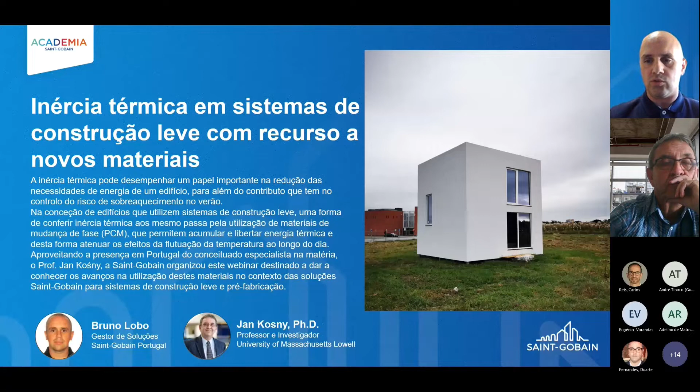Este webinar tem como foco a inércia térmica em sistemas de construção leve com recurso a novos materiais. Este é o projeto Thermacore, da qual somos parceiros, desenvolvido pela Universidade de Aveiro, que consiste em avaliar a eficiência térmica de painéis PCM macroencapsulados e a inércia térmica deste tipo de construções. Eu vou só contextualizar um pouco o tema para depois o nosso convidado, o professor Jan Kosny, definir aqui um bocadinho mais em termos de soluções deste tipo de materiais.

Aqui apenas um pequeno enquadramento do projeto e das soluções usadas. Este projeto consistiu, e consiste ainda, pois ainda não terminou, na construção de 2 células de teste de tamanho real, usando a mesma solução construtiva, cerca de 5,5 metros de largura, 5,5 metros de profundidade e 5,5 metros de altura. Ambas estas células foram instaladas no mesmo local, com exatamente a mesma orientação solar, apenas afastadas entre si para que uma não tivesse qualquer efeito de sombreamento sobre a outra.

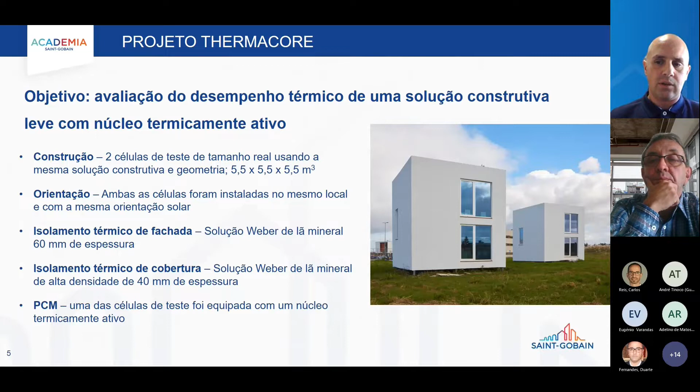O sistema estrutural é o mesmo, assim como o isolamento térmico da fachada e da cobertura, com a exceção de que uma das células tem os tais painéis PCM, enquanto que a outra não tem.

Aqui vamos focar um pouco nas soluções Saint-Gobain que foram integradas neste projeto. A estrutura destas duas células de teste é uma estrutura em LSF, revestida exteriormente com placas GLASROC X Load Bearing, placas estruturais com certificação estrutural para este tipo de sistemas, desenvolvidas idealmente com resistência para zonas úmidas e zonas exteriores.

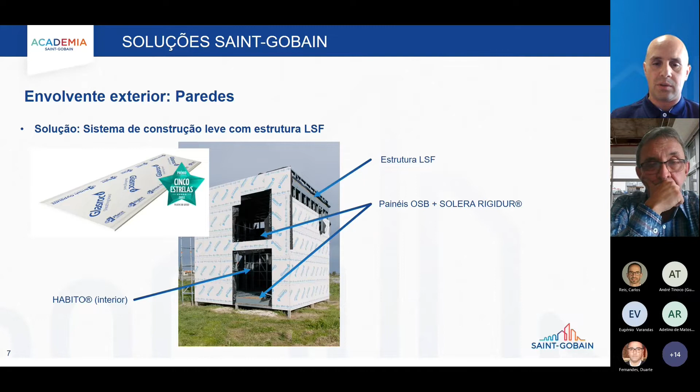O contacto com a água para a placa em si, mesmo sem qualquer tipo de tratamento especial adicional, não é um problema. No interior foram usadas placas HABITO, placas também de gesso laminado, mas aditivadas no seu processo de fabrico, de modo a lhe conferir capacidade estrutural. Ou seja, a combinação destas duas placas, por dentro e por fora da estrutura LSF, conferem estabilidade a esta estrutura.

Ao nível dos pavimentos, foi usada uma solução compósita de painéis OSB e a solução Solera Rigidur, composta por duas placas Rigidur solidarizadas entre si, de modo a conferir melhores propriedades térmicas, importante para o piso térreo, e também propriedades a nível de acústica.

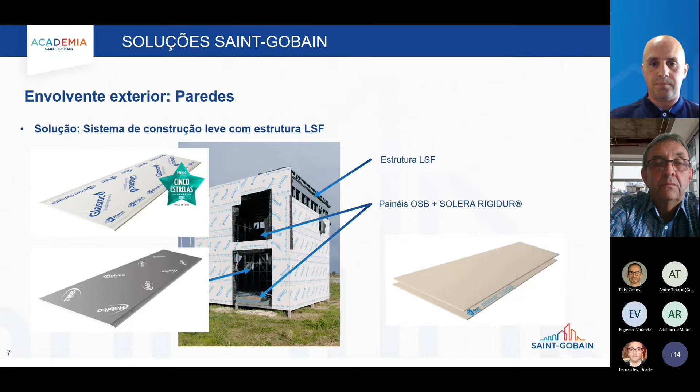No exterior, e para complementar a fachada, foi usado o sistema Webertherm Comfort, constituído pela placa GLASROC X Load Bearing mencionada anteriormente, um barramento, uma colagem feita no Weber Therm Pro. Posteriormente foi colocada uma lã mineral, lã de vidro de alta densidade, Weber Therm Clima 34 de 60 mm, complementado o barramento armado também com Weber Therm Pro e Webertherm rede normal, e antes de dado o acabamento em Weberplast Decor Plus foi aplicada uma camada de Weberprim regulador.

De referir novamente que esta solução foi aplicada nas duas células, exatamente a mesma coisa para podermos comparar os resultados. Os envidraçados foram realizados com caixilharia de alumínio, com corte térmico e com vidro Saint-Gobain, com um coeficiente de transmissão térmica U de 1.0 e um fator solar de 0.22.

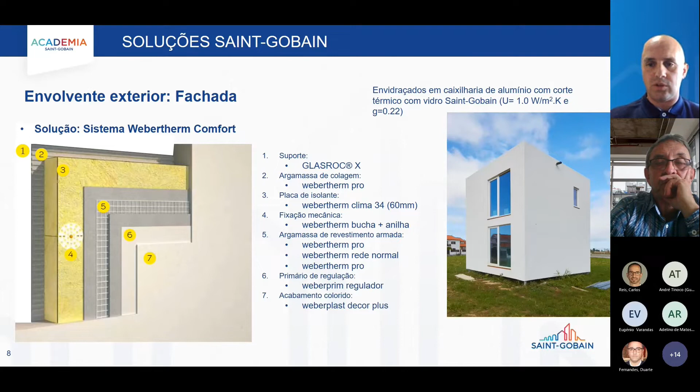Ao nível da cobertura, foi também realizada uma solução híbrida, seguindo o mesmo racional do pavimento. Foram usados painéis OSB, juntamente com a GLASROC X Load Bearing, que é uma continuação da fachada, e posteriormente foram colocados painéis de rocha IXXO 40mm, que já vêm preparados com uma emulsão que permite a aplicação direta de membranas bituminosas.

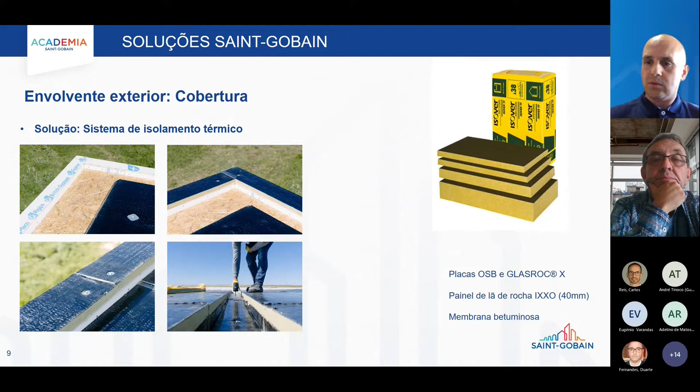Para fazer a impermeabilização da cobertura, temos aqui os painéis que acabei de referir. O resultado final da cobertura, podemos ver aqui duas fases: na célula da direita vemos ainda a fase de aplicação final das placas IXXO, enquanto na célula do lado esquerdo já temos a cobertura concluída e devidamente impermeabilizada.

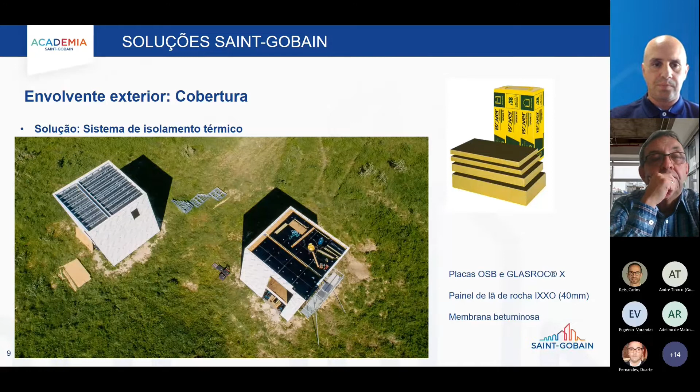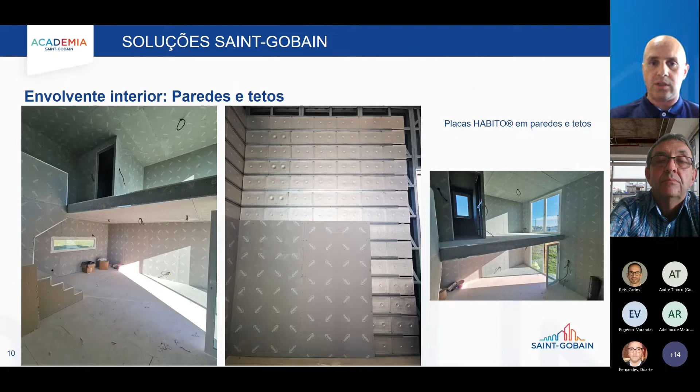Ao nível da envolvente interior, todas as paredes e tetos foram finalizadas com placas HABITO, sendo que, como referi anteriormente, uma das células foi revestida com estes painéis PCM, que era um dos objetivos do teste. Tal como pelo exterior, pelo interior as células de teste são iguais, com as mesmas divisões, colocadas com a mesma disposição, apenas a única diferença, volto a referir, são os painéis PCM.

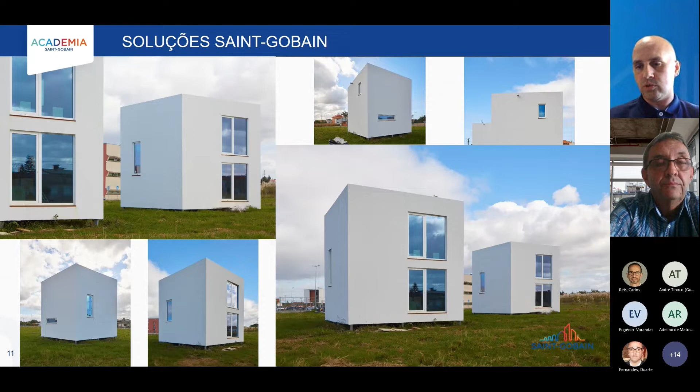E pronto, agora vou passar a palavra ao professor Jan Kosny, que vai esmiuçar aqui um bocadinho do tema da inércia térmica neste tipo de sistemas.

Professor, now it's your turn.

Thank you very much, I really appreciate the invitation. Sorry I'm not speaking in Portuguese, didn't have enough time in my life to learn yet, but maybe at some time I will. I must say at the beginning that it's a great pleasure to be invited into the Saint-Gobain related project, because in my life in the United States I've been involved in many projects together with Saint-Gobain. We had several projects focused on thermal insulations, and also several projects focused on both wall and roofing systems. So this is a very nice opportunity to be part of that activity here in Portugal, when you have wonderful climate conditions combined right now with the super advanced thermal testing facility for buildings.

I am quite positive, after seeing that facility and working with my colleagues from University of Aveiro, that pretty soon that facility will be well known, because I think they will be able to demonstrate advantages of the thermal mass and phase change materials. I think that in the near future they will be able to advance the path of how Portuguese buildings can go into zero energy space conditioning, achieving zero energy without most of the energy coming from mechanical systems, which can be very unique and actually very important considering the situation in Europe which we have right now.

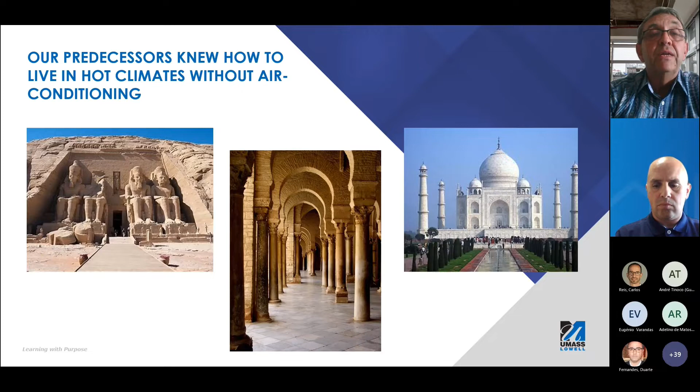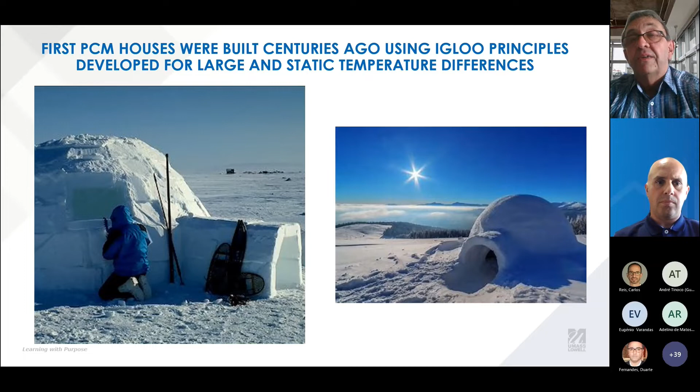Moving to the next slide, you can see that people have been using thermal mass and phase change materials for generations as well. This is an example of an early phase change material house, built long ago in history. You can see that generations of people up north have used this construction successfully with acceptable thermal comfort conditions. Now I'd like to show the building which is really the first phase change material building ever built.

This building was built by Maria Telkes, a professor at Massachusetts Institute of Technology, in 1941. In the early 1940s she analyzed the climate of Massachusetts and figured out that over a 65-year period, the longest time without sun was 9 days. So she designed an amount of PCM in that building to provide enough heat for 10 days without sun. And that building worked very well, providing 100% of the energy needed for heating.

It's a great message for you guys in Portugal. Comparing the climate in Massachusetts and in Portugal, they're just two different classes - you have much better conditions and much more sun. So looking from that perspective, this is a combination of thermal mass, phase change thermal mass, and solar design. If you use those advantages in Portugal, it's a message that we can easily achieve zero energy construction without adding too much expense.

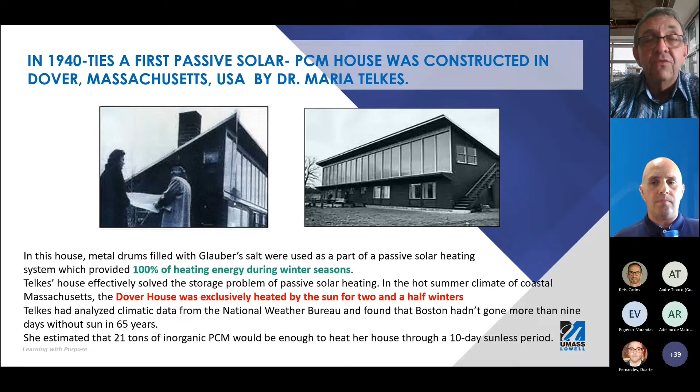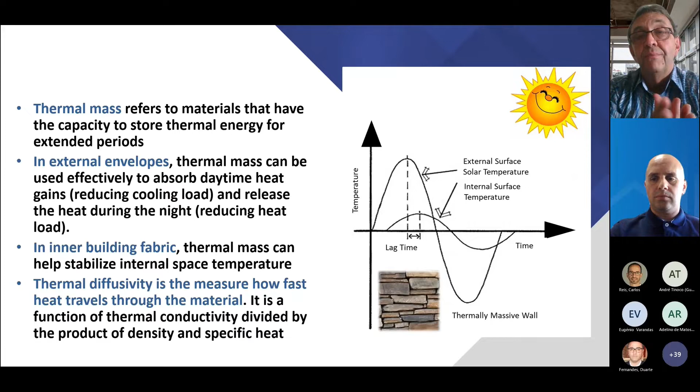This is very important, and you will see in further slides that in the national policy situation, when you have millions of people trying to use air conditioning units at the same time of the day, maybe not a healthy situation for the energy grid and the power companies, we have the tool to manipulate that peak load. Please remember that in most developed countries, buildings represent about 40% of energy consumption. I don't know exactly the number for Portugal, but I assume that number is similar here.

I would like to spend a little bit of time explaining to you what PCM, phase change material, is. And again, let's go to an example. Let's imagine that we have 2 glasses of Coke. 1 glass of Coke is without ice. Another glass of Coke is with ice. And we are walking on the street in the middle of the summer with 35 or 40 degrees Celsius. After 15 minutes, maybe half an hour, we try to drink Coke from one hand and from the other one. Imagine which one will be more pleasant to drink.

That one with ice. Now imagine we have a roofing insulation or roofing design, and one roof is without that extra ice. Let's call this ice phase change material. Another one is with phase change material. In the middle of the summer, the temperature of the roof without phase change material rises rapidly, following the sun moving through the sky. Quite early in the morning, 10 o'clock, the temperature is already going up. And the building is seeing this. Most commercial buildings use air conditioning, and they will have to react to that temperature increase.

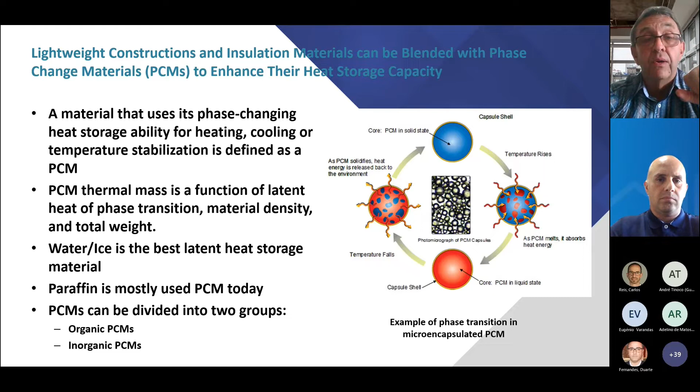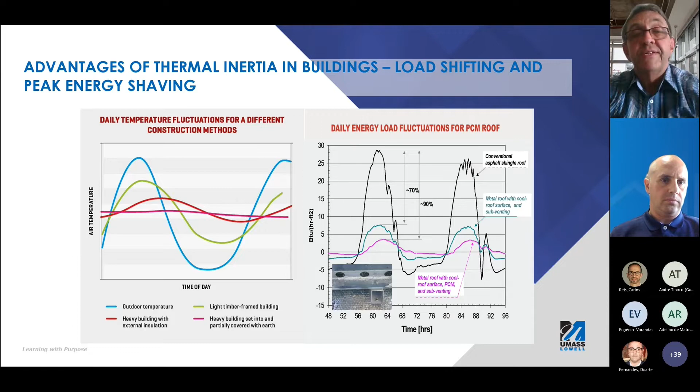And you can see from the statistics that we can reduce the peak load by 90%. It is just for one day, but it is easy to do 90–95% for the whole summer. So this is achievable. It's only a matter of using proper materials, proper technique, proper design. For those people who will ask me, okay, you have a different R value or U value for those roofs: no, the steady state U value in all those experiments was exactly the same. The next slide shows that people have been using phase change materials for several decades, and I give examples of the different systems.

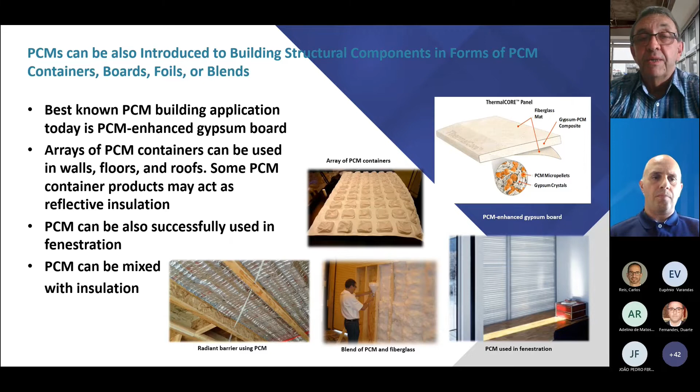And another important product on top is one of the gypsum board products, which has been known around the world for many years and used with more or less success, depending on design and on the phase change material used in that board. Around the world, probably 1,000 applications. And we can see also one of the applications when somebody is using phase change material as a part of the fenestration system.

So talking about phase change materials and thermal mass, I would like to tell you a little bit of information about advantages. I've been doing phase change materials for several decades. In the past, everybody was looking for energy savings. Right now, we are going to significantly different challenges and significantly different ways of applications of phase change materials.

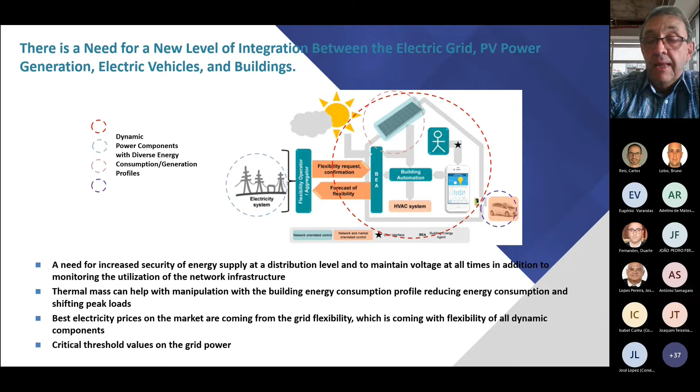But what we have right now, we have solar systems, renewable energy systems, which are extremely dynamic. And we have electric mobility, electric cars, which are another very dynamic group. An interesting fact about electric mobility is that they are coming with huge capacity for energy storage, because cars are coming with batteries. On the other side, we have the electric power grid, which is another very dynamic component. And in all this dynamic environment, phase change material can play a very important role.

In each average building, we have two major peaks. One morning peak, about 7 o'clock to 9 o'clock. Then energy use goes on in an almost leveled situation. And then we have a huge peak about 3 o'clock to 7 o'clock. Those peaks create a situation our energy system has to be designed against.

Our power supply systems are not designed for average energy supply. They are usually designed for the peak energy supply. And if that peak is going up significantly, we have to add additional capacity to produce in each country. And also we need to add additional capacity to transmit that power and deliver it to users. This is a very significant expense to each nation, and each nation is trying to minimize those peaks.

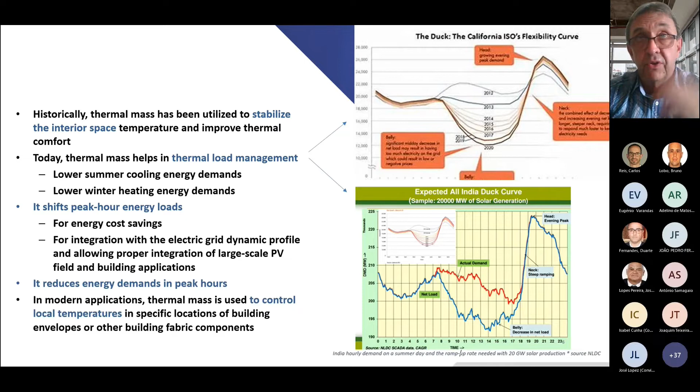And it is very, very important to have the capability to store energy. It doesn't matter if this is electric power or thermal power, because as I said, in buildings we can manipulate those loads, and buildings represent 40% of the whole energy portfolio in developed countries. So moving forward, I would like to discuss a little bit about thermal storage capabilities, and give you an example of how important thermal storage capabilities can be.

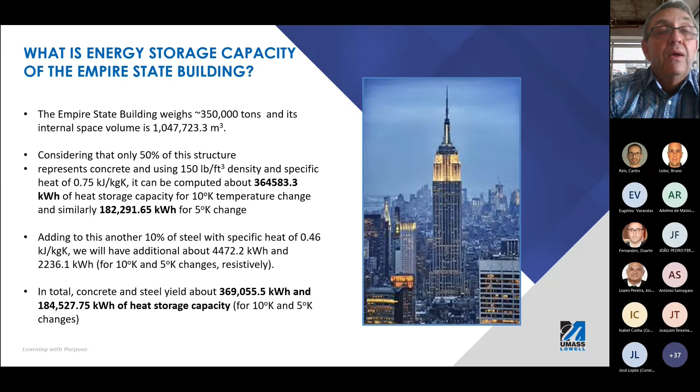I took the example of the Empire State Building. If you calculate all the concrete and all the steel in the Empire State Building, and assume a delta T of 5 degrees Celsius or 10 degrees Celsius, with a simple calculation of the amount of mass in that building, density, and heat capacity, you will see that the total heat capacity of the building is tremendously high: about 369 thousand kilowatt hours for 10 degrees, and 184,527 kilowatt hours for 5 degrees, assuming the temperature change goes through 5 degrees.

Now let's compare this to something. I did a comparison to Tesla Powerwall batteries. Each Tesla Powerwall battery, which is the system Tesla sells with their solar systems around the world, has about 7 kilowatt hours. So imagine that for a 10 degree temperature difference, the whole Empire State Building is equivalent to almost 53,000 Tesla batteries. If we assume a smaller 5 degrees, though most colleagues around the world use 10 degrees in analysis, we have 26,000 Tesla batteries. This is the thermal storage capacity of that building.

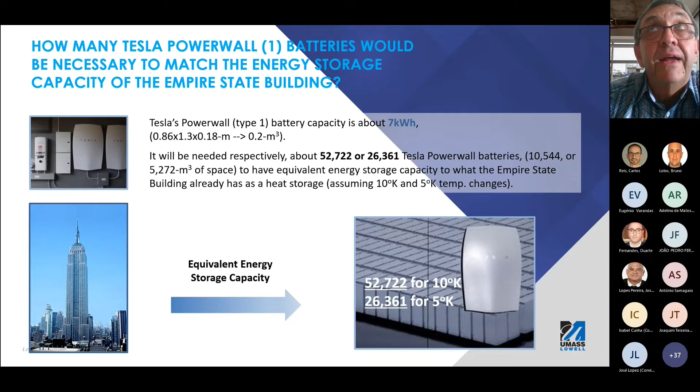Of course, we can ask ourselves how available this energy is, and so far, yes, I agree. But also ask yourself how many buildings like this we have in each country. How many concrete buildings? How many multi-story buildings? How many shopping malls? This is huge capacity which can help the whole energy economy for developed countries, and not only developed countries. We also have millions of residential buildings, and in the US, 60% of energy consumption in the building sector comes from residential buildings, 40% from commercial buildings.

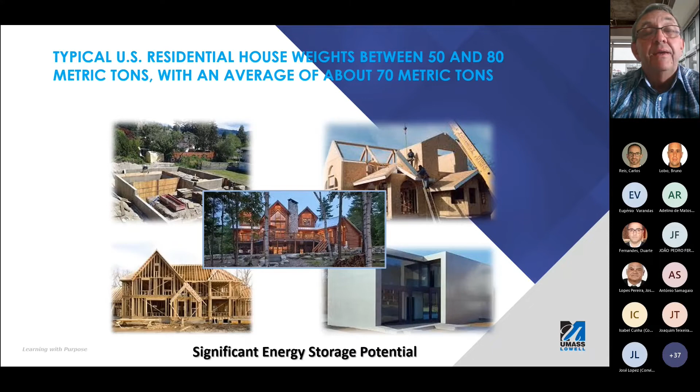I don't know the situation in Portugal, but probably it may be 50-50 or something similar. Imagine that each average residential building in the US weighs between 50 to 80 metric tons of materials. It's mostly concrete, wood, and some other materials, which can be considered thermal storage options if well designed.

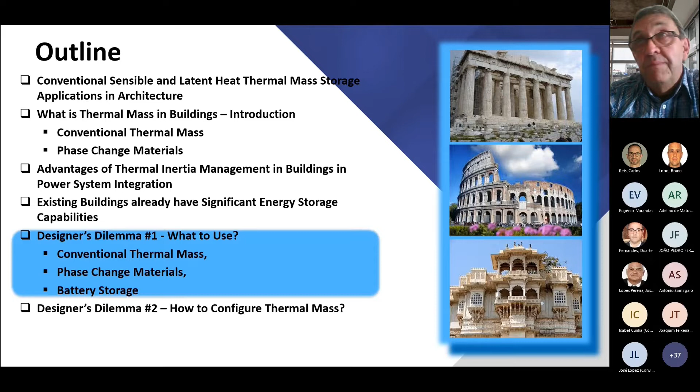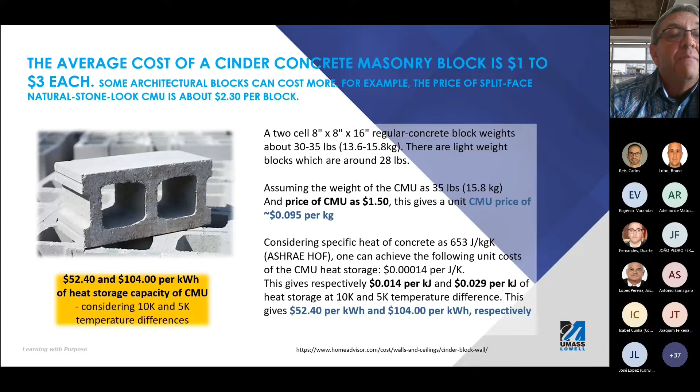So now I would like to talk a little bit about the designer's dilemma, what to use: conventional thermal mass, phase change materials, or maybe the easiest way, battery storage. So let's ask ourselves how much energy stored in a specific material costs. I don't want to go through all the calculations; if somebody asks me, I can send the presentation, but you can see that there is $52 to $104 per kilowatt hour stored in a concrete masonry unit.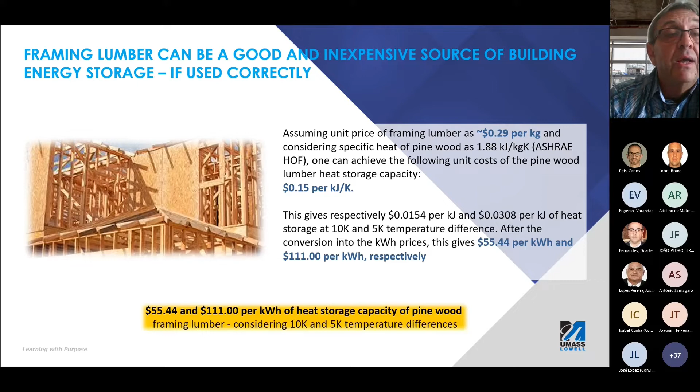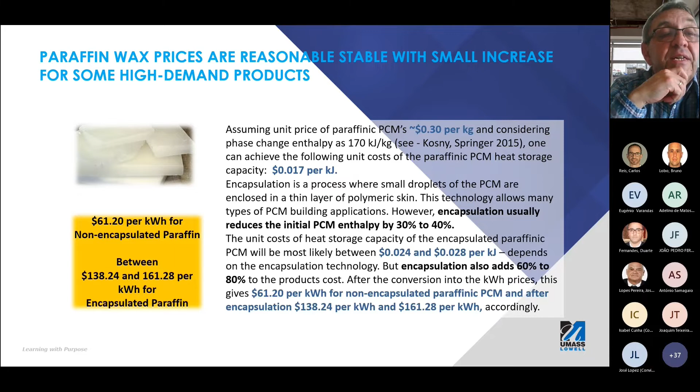If we go to wood, we have a cost between $55 to $111 per kilowatt hour of stored thermal energy. If we go to conventional thermal material, I used paraffinic materials here, it is between $138 to $160 per kilowatt hour of stored thermal energy. Now let's go to something which all industries... actually, I was reading news the day before about companies working on batteries, that new company for Volkswagen.

So this is probably one of the most busy businesses. But look, in this case, per stored kilowatt hour it's about $273 per kilowatt hour. So this is more than two times more than for phase change materials, and 3, 4, 5 times more than for conventional building materials. Question is, how much of the batteries and how much lithium we can use?

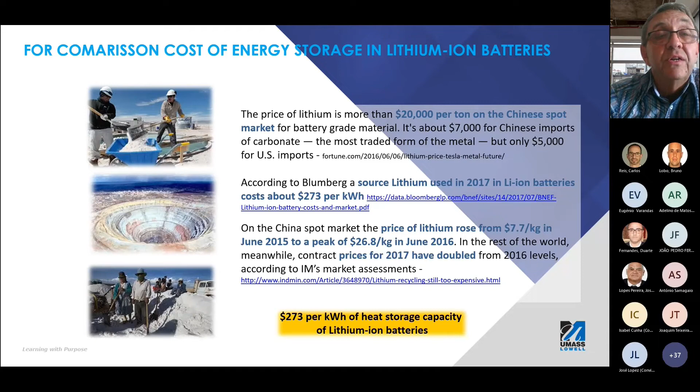And you could see actually devastation of the environment in case of the lithium production. How much can we tolerate as human beings in the future, and how much energy will we be able to effectively save with those lithium batteries, considering that we will have increased demand for energy storage in the future. And actually, there is another picture telling what will be the consequences.

And I would like to give you a comparison of the cost of recycling. Recycling of concrete, and this is US California state data, is between 60 cents to $25 per ton, depending on where this concrete is coming from and how it is used. Then recycling of wood is about $24 per ton. Recycling of phase change material and paraffin is just the cost of production of new products, and actually it is very difficult to estimate, but that paraffin doesn't have to be recycled, it can serve more and more for new generations

of the products. And when you go to the recycling of lithium batteries, there are many different estimates, and I don't want to be off, but I put just a range of the cost which has been listed by several agencies, and I gave the references. It's between $1,000 to $2,000. There are some optimistic people saying that they can go below 1,000, but in general, the conclusion is that, even though we have the ability to recycle batteries, it takes 28 batteries to make a single new one, and a lot of agencies are still considering this as not cost effective. It has to be highly subsidized by governments in different countries.

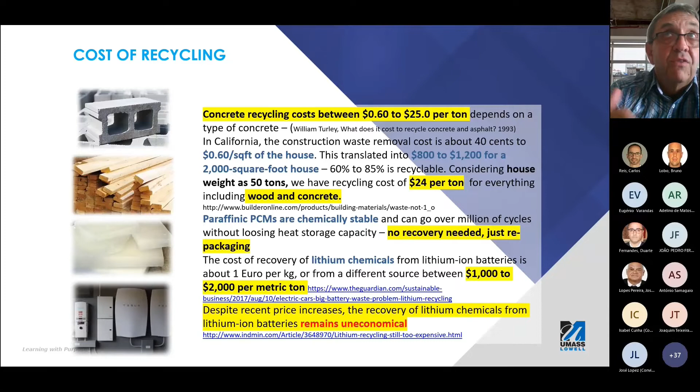So I would like to move on to the second designer's dilemma, how to place thermal mass within the building. And this is a very important question. We had a discussion with the University of Porto and University of Aveiro, and they asked me, okay, how about that PCM? And I said, there is no a PCM. There is a specific PCM for a specific application. That's the reason why we have so many failed PCM demonstration projects around the world, is that people have been trying to use a PCM. PCM is not a solution for any energy problem in buildings. PCM has to be designed well.

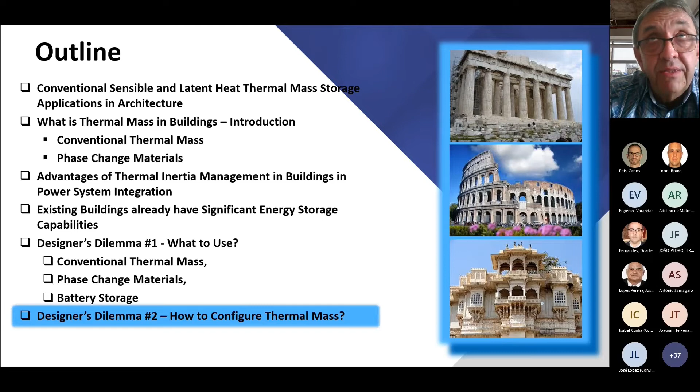And actually the same way, like you cannot say, oh, give me that beam and I will use it for that bridge. It never goes that way. An engineer has to come and calculate what has to be the specific cross section of that beam, what kind of materials, and how long that beam can be, just to support the maximum load. The same as with PCMs. PCMs have to be well designed, the same way like other engineering issues. If we will not design, we will have another group of failures.

How important is placement of thermal mass in buildings? Let me give you the simplest possible example. Let's imagine that we have a concrete wall insulated with thermal insulation. On the first drawing on the top, we have thermal insulation on the exterior side. And on the other part below, we have thermal insulation, which is pink or orange, on the interior side.

I am showing you just the value of thermal inertia, the thermal time constant for that specific assembly, and we can see that for the first case, when we have thermal mass facing the interior of the building, the thermal time constant is about 43. If we have insulation facing the interior of the building, the time constant is 7. That means that just that simple switch of material is changing the time constant about 6 times. It's something good to realize.

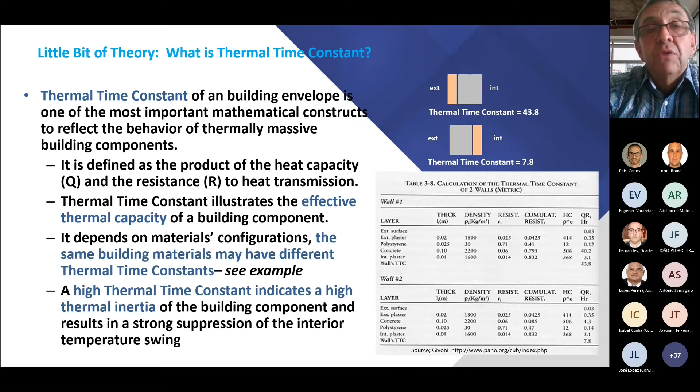And actually, there's the first conclusion. If we want to use the thermal mass effect, let's put that thermal mass facing the interior. If we don't, who cares? But we may have some energy penalties. And actually, this is a very good example of how important that placement is. I show you simulations of a small single-story residential house, where we did simulations for several locations across the US in different climates, and this is average data for different locations.

And you can see that definitely the system with the thermal mass facing interior, and another one with insulation being placed inside the whole assembly, are significantly better than other systems. We can make many justifications, and actually codes in most countries are not giving credit for that placement of thermal mass. But good designers should know about this, and a good designer should at least explain to a potential client that placing insulation on the interior may not be the best choice.

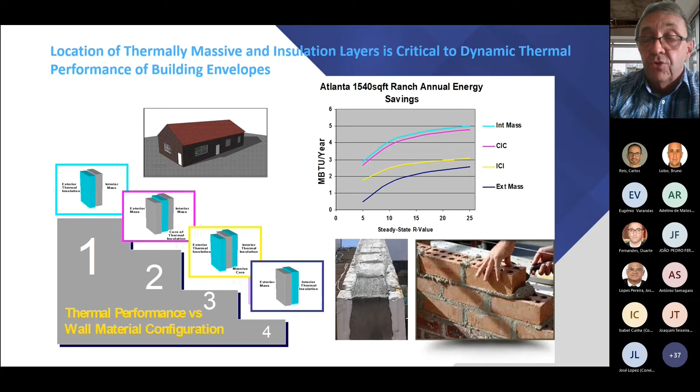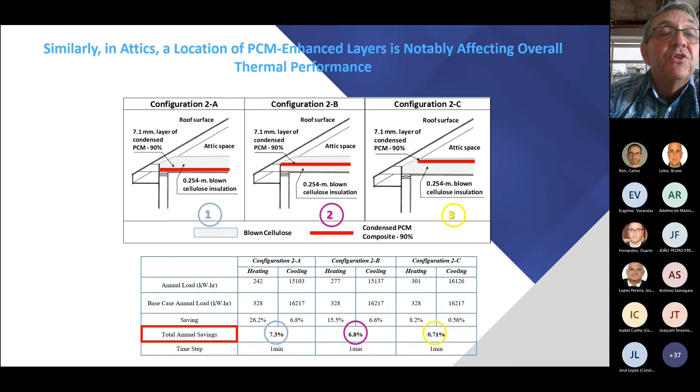I would like to conclude, because we have limited time, with this short summary, telling you that if we start to talk about the environment and we would like to use our resources in the most effective way, we should also start to understand the systems we are designing better. And to better design those systems, we need to incorporate building dynamics. The current political situation in Europe, and also the energy consumption situation, may force us to better use dynamic building systems. And I showed you that if we implement dynamic components of the building in the right way, we can shave those peaks of energy and we can shift those peaks of energy to a different time.

Different designers and mechanical system designers tried to do this, and it was called a big success. Somebody could shift that energy peak using conventional mechanical systems by half an hour. With thermal mass, it is easy to shift that peak 4 hours. I designed several systems, and I can shift that thermal peak even more than 8 hours. So this is possible. And my major message is, remember, just try to understand the dynamics of the building. The dynamics of buildings can be very helpful. And we need to start seriously thinking about our environment.